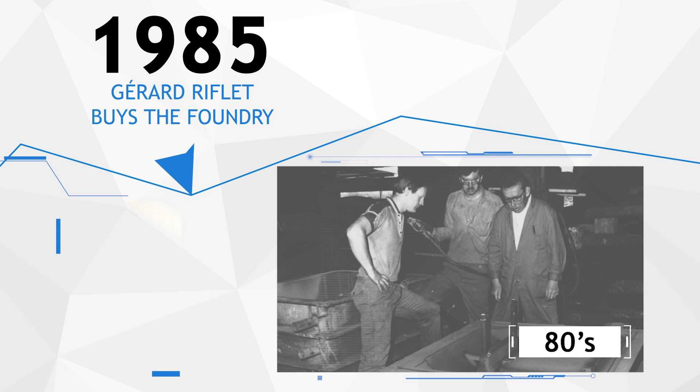The history started in 1985. Gérard Riflet, who worked at the foundry Jules Leroy since 1972, bought the business situated in Châteaubriant.

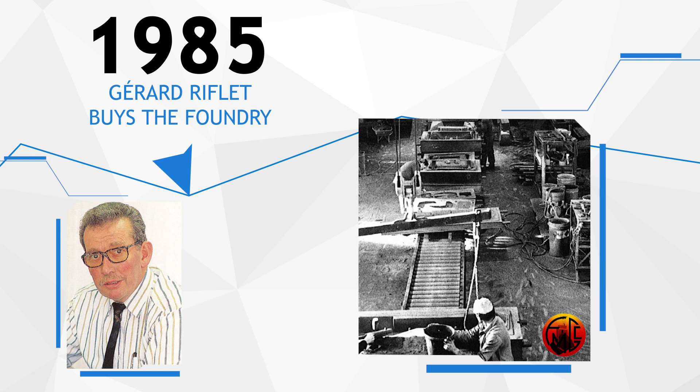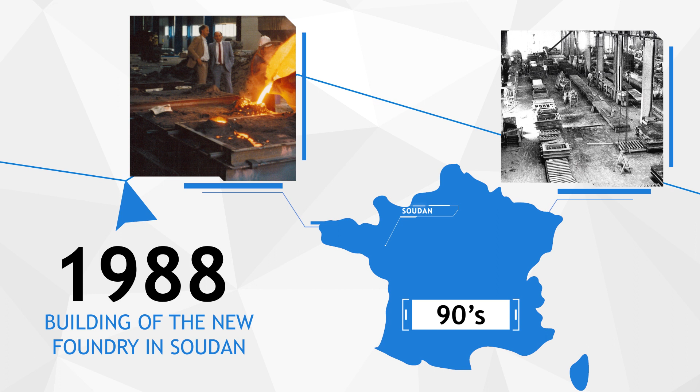The new foundry, FMGC, first opened its doors on the 29th of August 1988, with a yearly production of 8,400 tons on an area of 5 hectares with 3,500 square meters covered.

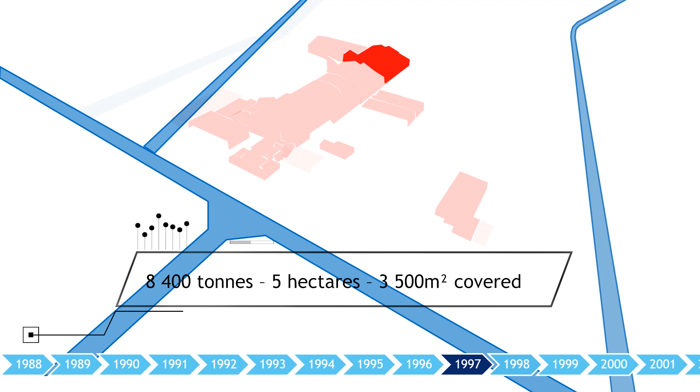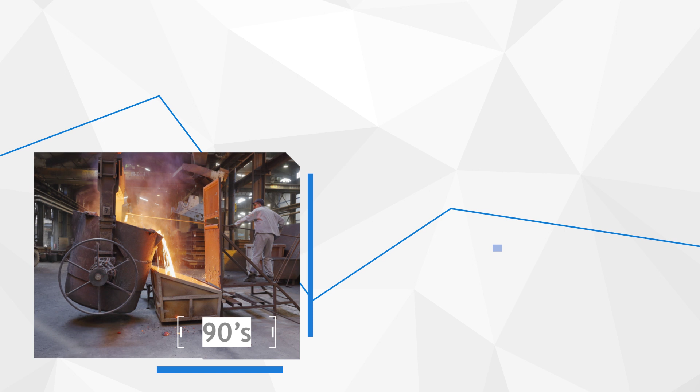Very quickly, the business accelerated, and the notoriety of the business spread, passing the borders of the region. The buildings grew each year to answer the demands of the clients, and to perfect the production, they continued to grow year on year. During the 90s, the main item manufactured at the Fonderie et Mécanique Générale Castelbriantaise was the counterweight, products dedicated to forklifts, cranes, public works machinery, and boat keels.

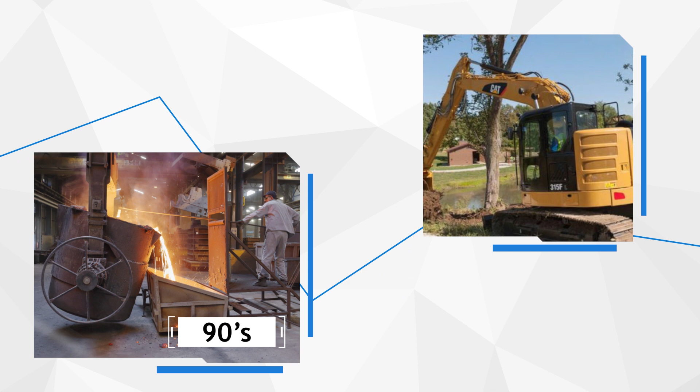The business developed its knowledge of the foundry and also the machining, with the addition of digital controlled machines, which allowed the company to become today the European leader in the production of cast iron counterweights.

In 1997, Frédéric Guinaud integrated FMGC into the Farinia Group. The society relies on the competence of 230 workers over an area of 18,000 square meters.

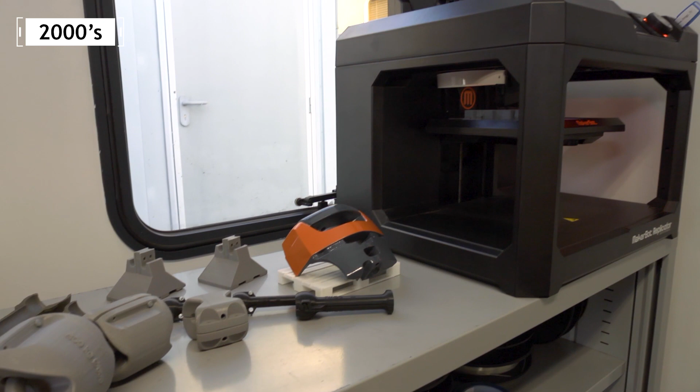The years 2000 confirmed innovation as the driver of development at FMGC. The business started acquiring new equipment to increase its production capacity, but also for better working conditions for the workers. Today at FMGC, the yearly production is 82,000 tons of cast iron.

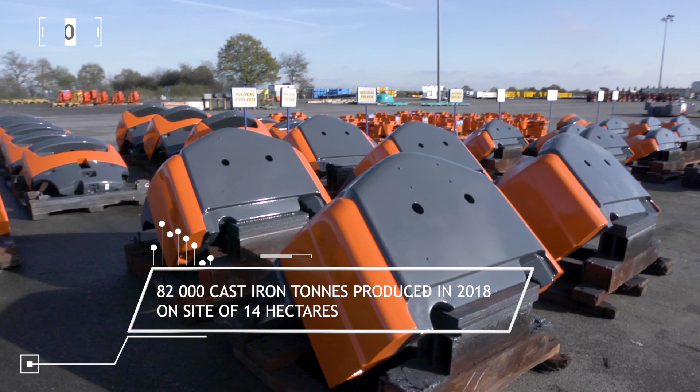In 2012, FMGC decided to diversify its activity and chose renewable marine energy. FMGC launched its development of weights for the gravity bases of the tidal turbine Sabella D10, the anchor lines, protecting and ballasting shells for submarine cables, or the supply of clump weights for Ideol, the first French floating wind turbine in the Atlantic Ocean.

This year, in 2018, FMGC is 30 years old. 30 years of history, 30 years of evolution, 30 years of innovation. Behind FMGC, there are nearly 400 people who work every day on a site of more than 14 hectares in Soudan, the historic site of the business.

The society realized last year a turnover of 70 million euros. The business is still thriving today because FMGC has always kept attention to its customers' needs.

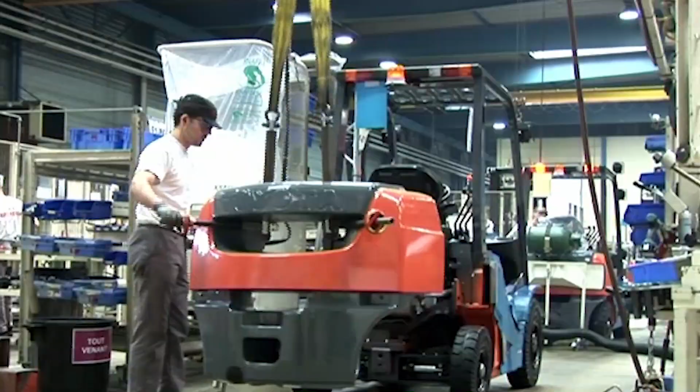Customer satisfaction is one of FMGC's priorities, who commit daily to maintaining the relationship of confidence with its historic partners. The business today counts over 1,000 references with a presence in 6 countries.

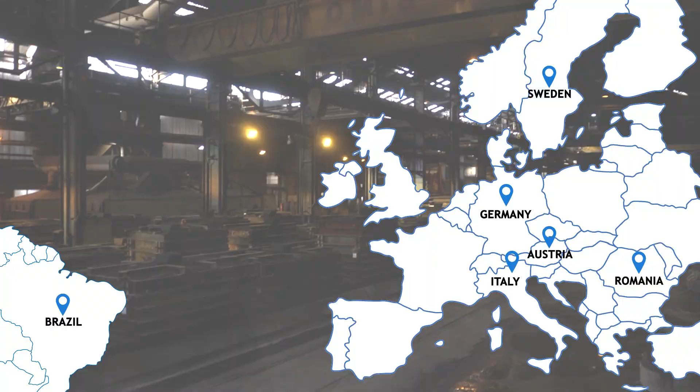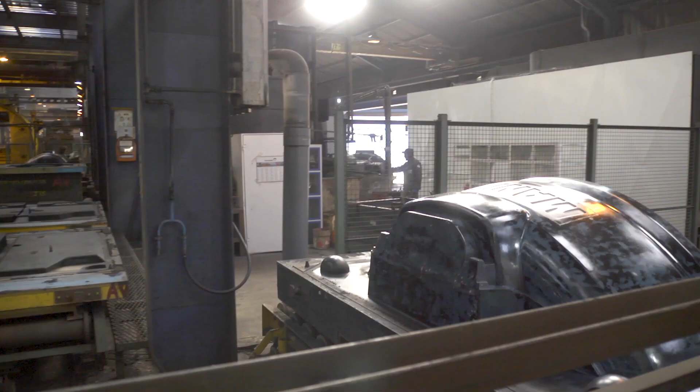However, the engagement of FMGC does not stop there. The policy of quality, security and environment is central to the working process, certified ISO 9001 and ISO 14001. The development of capacity and innovation of the enterprise applies alongside the security of its collaborators and the respect of the environment.

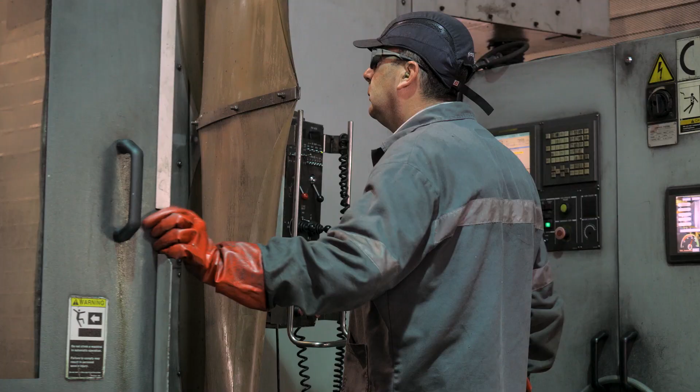The history and the success of FMGC is based on a strong company spirit that values human values, competence, and commitment to collective work based on the diversity of teams.

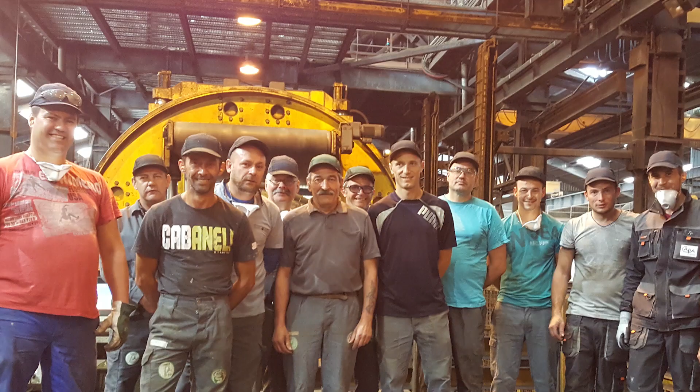Because the well-being of workers is at the heart of our concerns in the company, FMGC has since 2018 begun a program specified to increase the quality of life at work, including dynamic relaxation, warming up exercises before the working day begins, and improved internal communication, or again, financial help for the workers who wish to subscribe to a sports club.

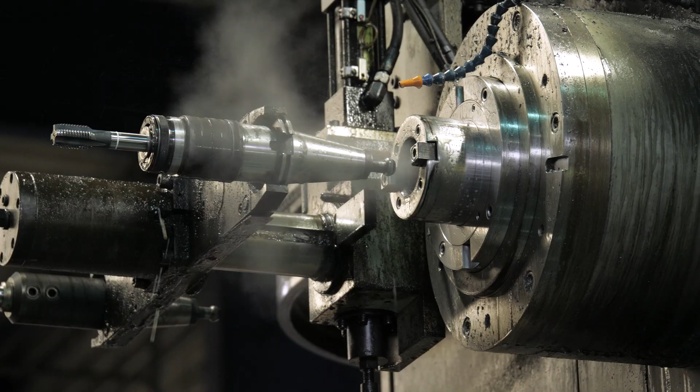Since it began, FMGC has always appreciated the challenge and innovation, and has permanently adapted in a fully changing environment. In order to guarantee reliable performances, FMGC combines the best selection of raw materials and processes of high-quality fabrication. From the initial preparation to the final design of cast iron counterweights, the company has state-of-the-art production tools.

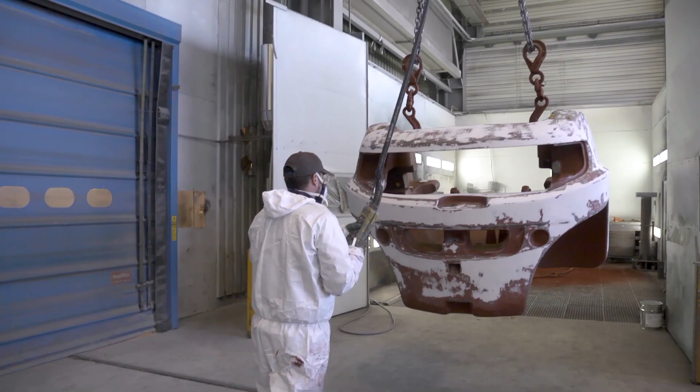The foundry produces multifunctional products, integrating bodywork and support of mechanical and electronic elements, some of which contain up to 30 inserts which are machined using digital machines.

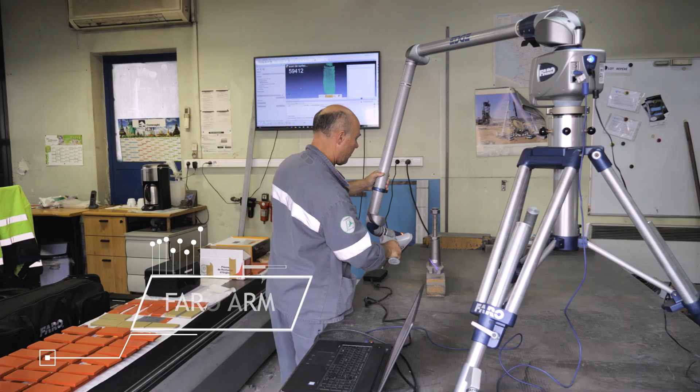A true player in digital transformation in the world of industry, FMGC invests every year in research and development, thus acquiring new digital technologies at each stage of the manufacturing process.

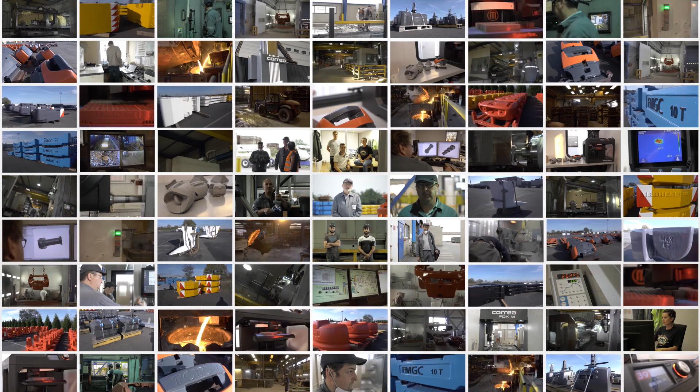In 30 years, FMGC has transformed thanks to the know-how of its employees and the loyalty of its customers. And that is the beginning of the story.